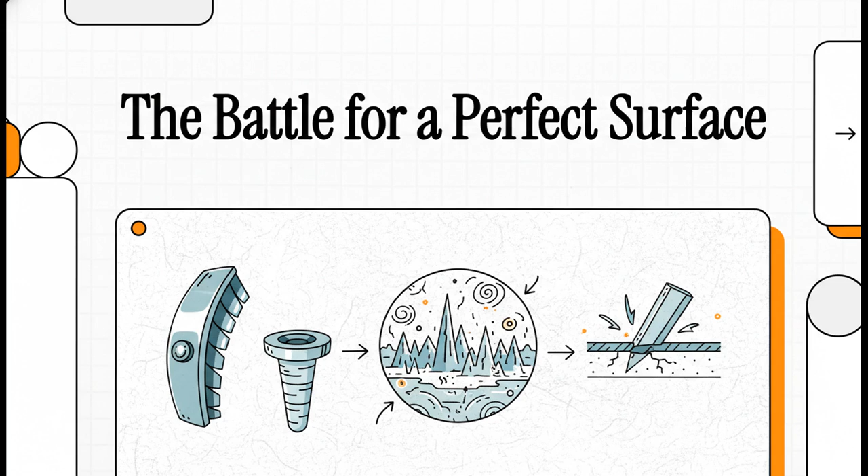You ever look at a piece of high-tech gear, like a turbine blade in a jet engine or a medical implant, and just marvel at how perfectly smooth it is? Well, it turns out getting that flawless finish isn't just about polishing. It's a full-on microscopic war against physics, where the very tool doing the creating is also trying to destroy its own work. So let's dive into the wild and, believe it or not, kind of violent world of getting a perfect surface.

So why the big deal? I mean, what's so important about being smooth? Well, for these super high-performance parts in aerospace or medicine, the surface finish isn't just about looking good. It can literally be a matter of life and death. A perfect surface means the part works exactly how it's supposed to and for as long as it's supposed to. Any little flaw, no matter how tiny, can become the starting point for a total, catastrophic failure down the line.

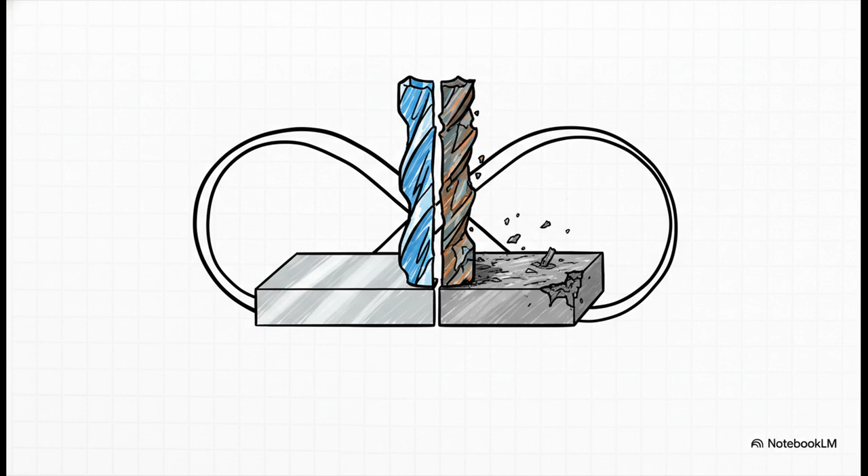And here's the central problem, the real kicker of this whole process. The cutting tool, the thing that's carving out this perfect shape, is actively wearing itself out with every single pass. It's in a constant state of self-destruction, and every little bit of decay from that tool gets directly transferred to the very surface it's trying to make perfect. It's a paradox.

Okay, so to really understand the problem, we've got to start at the source. We're not talking about a tool just snapping in half. No, it's more like a slow creeping death, a bunch of different ways the tool wears down that together act like the very first domino to fall. And listen, it's not as simple as the tool just getting dull.

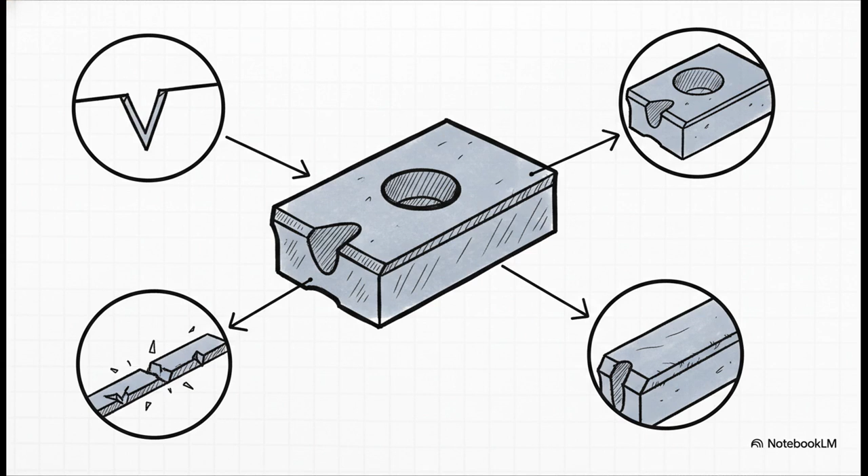It's way more complex. You've got flank wear, which is basically friction just rubbing the side of the tool away. Then there's crater wear, where super hot metal chips literally gouge a crater out of the tool's face. You've also got chipping, which is just what it sounds like, tiny little fractures that break off the sharp cutting edge. And finally, notch wear, which focuses all that stress and damage right at the cutting line. Each one is like a different enemy attacking the tool.

And this isn't just some textbook theory, right? When researchers looked at super tough materials like Inconel, the stuff used in jet engines, they saw this connection plain as day. A recent study from 2023 confirmed it. As the tool wears down, the surface gets rougher and you get more burrs, those awful little slivers of metal that hang off the edge. The takeaway here is simple. A dying tool makes a bad part.

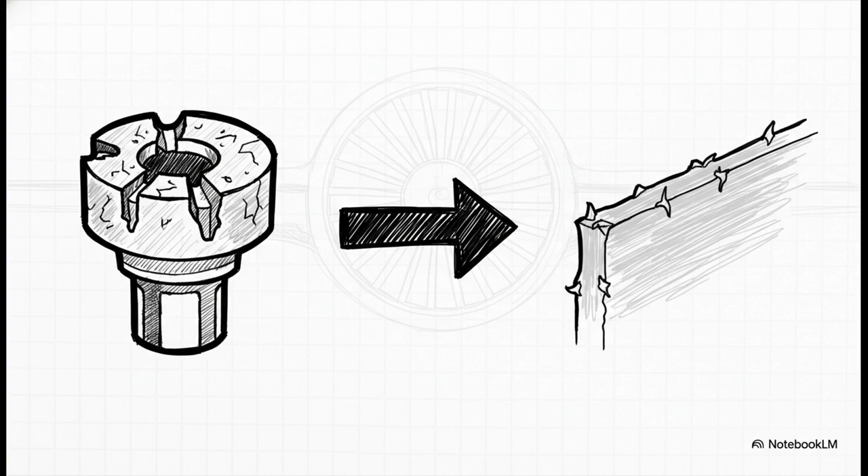But that first bit of tool wear, that's just the beginning. It's the spark that ignites a massive chain reaction, a whole cascade of problems, where one tiny issue quickly spirals into a bunch of bigger ones. So here's how those dominoes tumble. First, the tool edge gets dull. Now, because it's dull, you have to push harder, which creates way more friction and heat. All that extra force and heat means the tool isn't cutting cleanly anymore, it's just plowing and tearing through the material. And here's the really critical part. The damage is no longer just on the surface, it starts getting shoved down into the material itself.

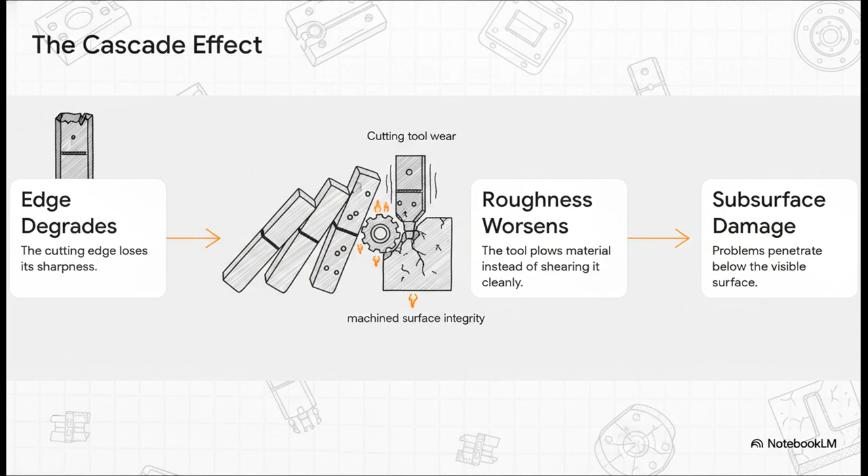And we see this everywhere. Just this past year, a study on tough stainless steels, the kind you use for parts that are under a ton of stress, saw the exact same thing. As the tool wore out, it started plowing material instead of cutting it, completely wrecking the finish. It's a universal problem in manufacturing.

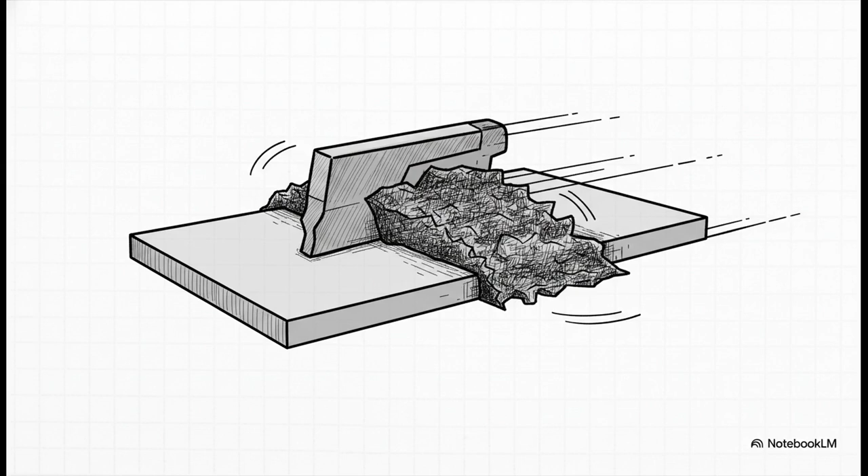So, up to this point, we've been talking about problems you can actually see and feel, like a rough surface. But the most dangerous part of this whole story is what you can't see. It's the damage that's happening just below the surface. And this is where it gets really scary. All that heat and force from the worn tool, it creates tiny micro cracks that are like little ticking time bombs waiting to grow.

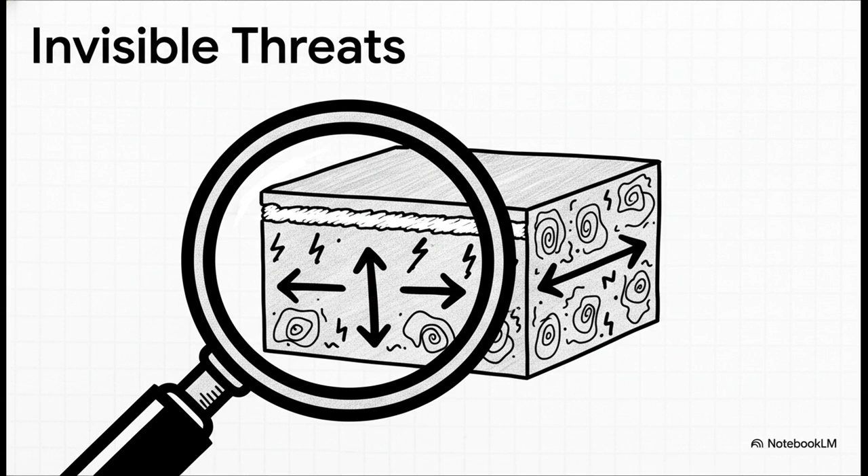It can also form something called white layers, a super hard but really brittle layer that can just flake off. It locks in stresses that are constantly fighting the material's own strength, making it weaker. You're basically changing the metal's DNA, and not in a good way. And we know exactly how this happens.

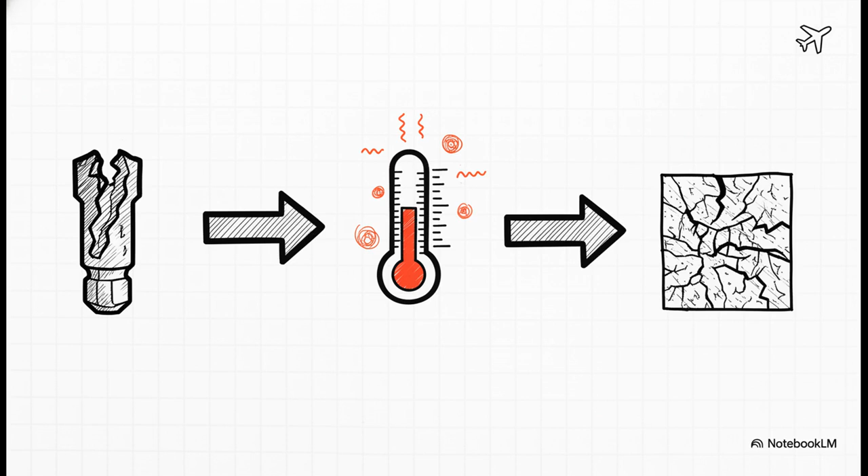Research on a key aerospace titanium alloy, Ti6Al4V, connected all the dots. As the tool wears down, the temperature skyrockets. That heat directly causes more deformation and more cracks to form just under the surface. It is a perfect storm for failure. And hey, don't just take my word for it.

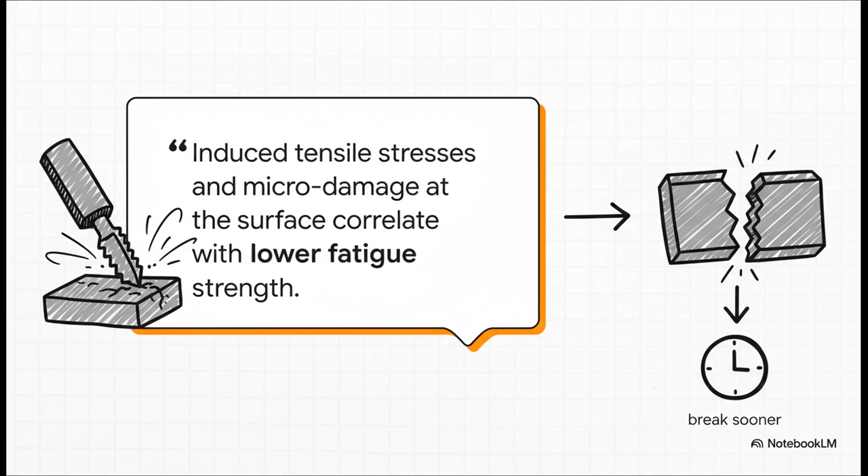As one research team put it back in 2022, all this hidden damage, the stresses, the tiny cracks, it all leads directly to a part that gets tired faster and doesn't last as long. In other words, the part is going to break way sooner than it should, all because the tool that made it was wearing out. So yeah, that all sounds pretty bleak, right?

But this is a battle, and engineers have come up with a really incredible toolkit of advanced tricks to fight back and break this chain reaction of damage. One of the coolest, literally, weapons in the arsenal is extreme cold. It's called cryogenic machining. You basically blast the cutting area with liquid nitrogen to keep everything incredibly cold, which directly attacks the main villain of our story, heat.

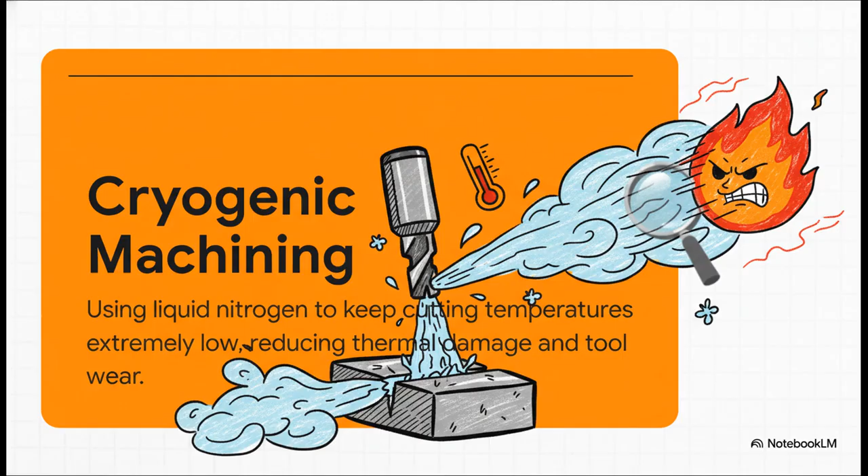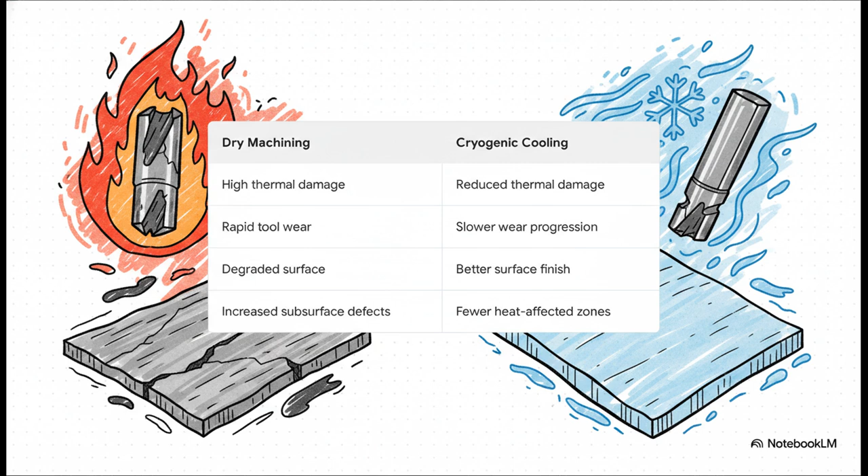And the results? They are just night and day. Just look at the difference for that titanium alloy. Compared to cutting it dry, flooding it with liquid nitrogen massively reduces heat damage, the tool wears down way slower, the surface finish is way better, and you get far fewer of those dangerous hidden defects. It's an absolute game changer.

Another really smart technique is MQL, which stands for Minimum Quantity Lubrication. Instead of drowning the part in coolant, MQL uses this superfine, targeted mist of oil and air shot right at the cutting edge. Think of it like a sniper rifle versus a fire hose. It's a precision strike against friction, and it barely uses any fluid.

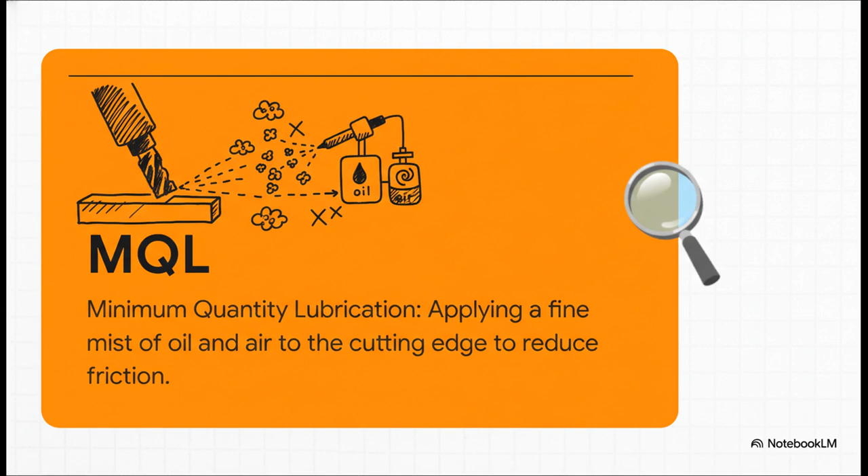Okay, now get ready for a total mind bender. What if, instead of fighting heat with cold, we fought it with more heat? It sounds crazy, I know, but that's the whole idea behind thermal-assisted machining. You use a laser to heat up the metal right before the tool gets there, which makes it softer. And a softer material is easier to cut, meaning less force, less friction, and less tool wear.

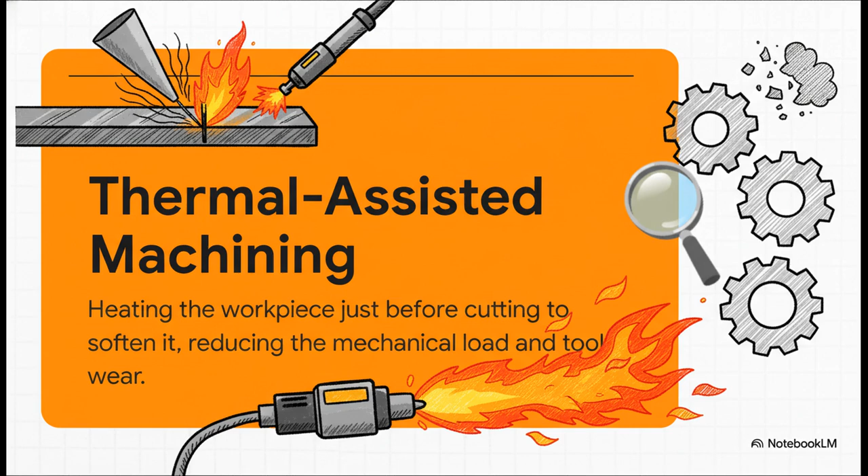So just how well does that crazy idea work? Well, let me just throw one number out there for you, 91%. What does that mean? It means a recent study found that using this preheating method on a tough tool steel made the surface an incredible 91% smoother. By making the material just a little bit softer, they practically eliminated all that plowing and tearing we were talking about earlier.

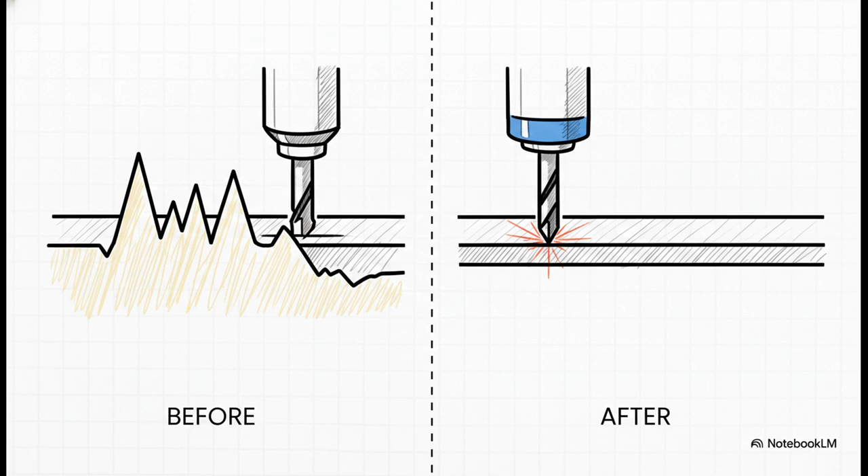Now, these techniques are amazing, don't get me wrong, but they're all about playing defense, preventing problems from happening. The next giant leap in this field isn't about prevention. It's about seeing problems as they happen and reacting in real time. And this is where we start getting into stuff that sounds like science fiction.

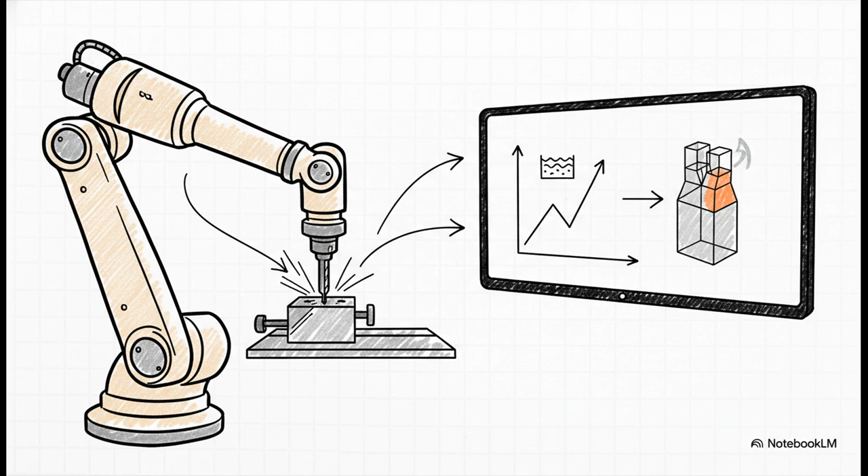Researchers are actually building systems that give machines senses, the ability to measure the surface roughness and check on the tool's health while it's cutting. I mean, imagine a machine that can actually feel its own tool wearing down and see the microscopic damage it's causing, all in the moment.

And that really leads us to the final big question. If a machine can see a problem happening in real time, could it one day just adapt? Could it adjust how it's cutting to make up for the wear? Or maybe even trigger a little robot to come in and sharpen or replace its own tool, long before any real damage is done? The battle for the perfect surface is still raging on, and it looks like the next generation of soldiers might just be intelligent machines themselves.